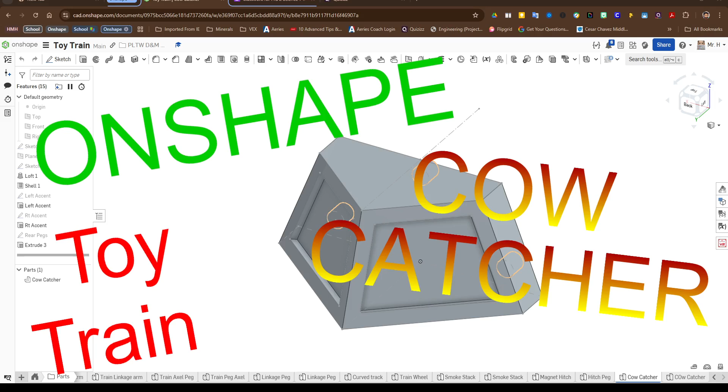So what you're seeing right here is going to be what's called the cow catcher. It goes on the front of older trains, and it's going to stop cows from being smashed. It scoops them up and moves them out of the way. It's not that hard of a piece, it's kind of really simple.

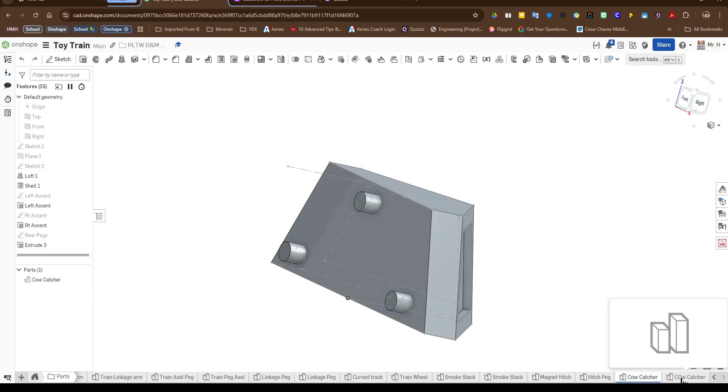So what we're going to do is create our new Part Studio right here, and let's get into it. The first thing we're going to do is make a new sketch on the top. I'm going to click on my view cube up here so I can see the top plane. I'm using the front and the right as my X and Y axis. So what we're going to do is use the line tool, and we're going to make two lines.

One going across here, and we're going to make this 22.86 millimeters, like that. And then we're going to make a second line going vertical, right here, and we're going to make this 6.35 millimeters, just like that.

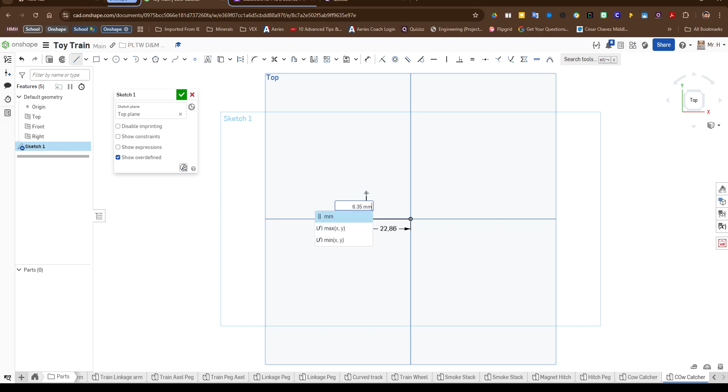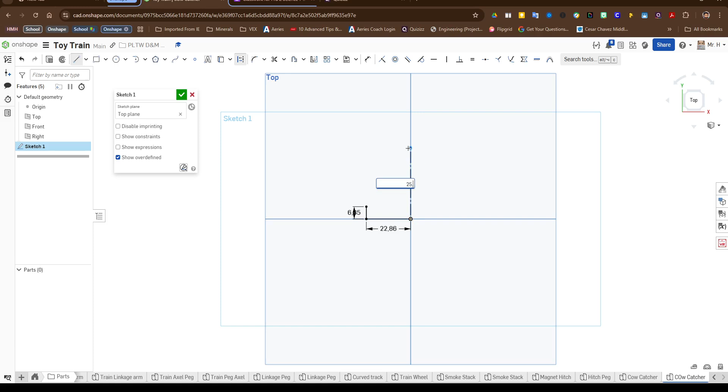Now I'm going to exit out of my line tool by hitting L or coming up here. Then we're going to make another line, take the line tool here, and take the construction option. We're going to make a vertical line at 25.4 millimeters, just like that. Now I'm going to take the construction line off and connect these two lines right here.

That completes that. Now it's really important that we make sure that this is all black. If you have one blue line here, that means your constraints aren't right and you didn't really put it together correctly. Just delete it and start again.

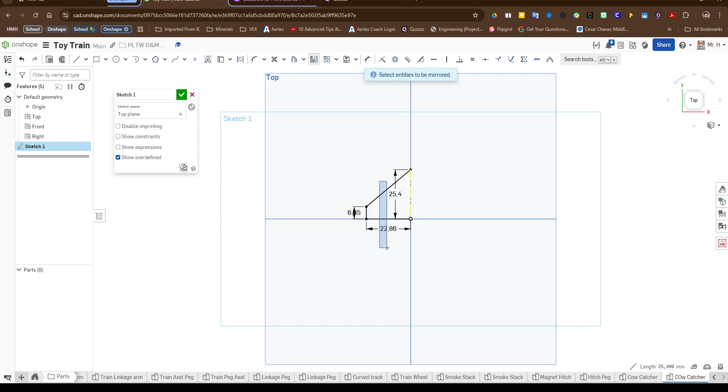Really simple. Now we're going to only get half, so we're going to create the other half, and it's important that we keep this as a construction line. So I'm going to come up to the mirror tool, which is right here. On the mirror tool, I'm going to click on my mirror line, and then go ahead and click on that. Now what I did is, instead of clicking on each one, I just pressed down on my mouse and dragged it so all the lines got highlighted, and it created it in one shot. So that's one way to do it.

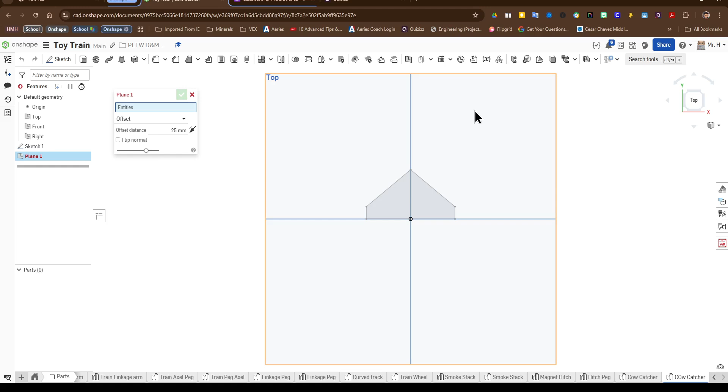All right, so now we have that completed. We have the first part of this done. So now we are going to go ahead and create a plane offset. Take my plane tool on my top plane, and we're going to offset this to 19.05 millimeters, there you go. I'm going to go ahead and just finish that. And now we have plane one.

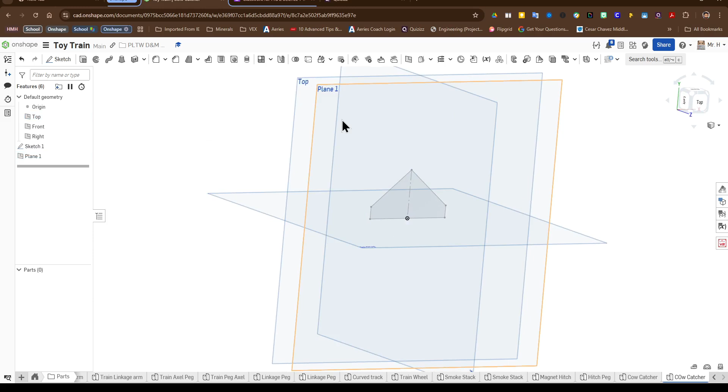So now on plane one, we're going to create a brand new sketch on plane one. That should be our active plane. I'll just go ahead and toggle off the top plane so that we only have that. Now we're going to do the same thing we did here, except with slightly different measurements. So I'm going to go ahead and use this for it here, and create my line.

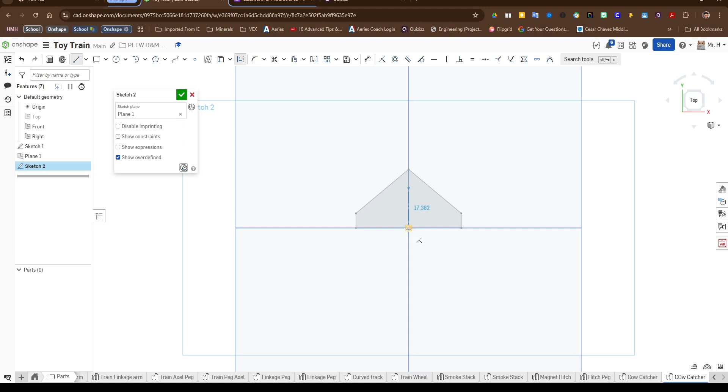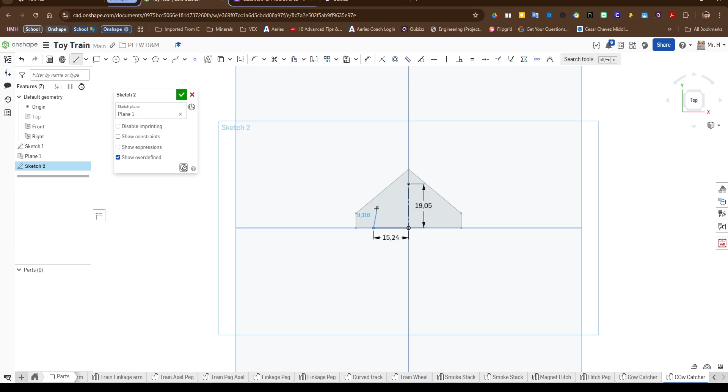I'm going to come down here, just like this, to the center point, origin. And I'm going to make this at 19.05 millimeters, like that. I'm going to remove my construction line. And I'm going to make a horizontal line that's going to be 15.24 millimeters, and then a vertical line at 6.35 millimeters.

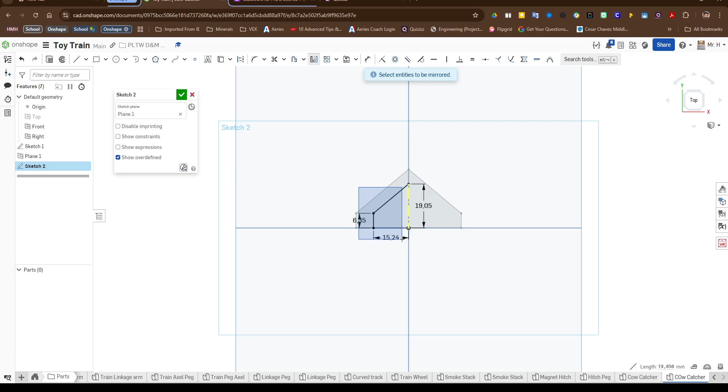I'm just going to connect these two together like so, and that takes care of that. Now I'll deselect my line tool, take the mirror again, select my center mirror line, click out here and drag it, and see if it grabbed it. Now it only grabbed one, that happens sometimes, but we're still in the mirror tool, so just click on here and here, and there you go. Sometimes the mirror tool doesn't always work.

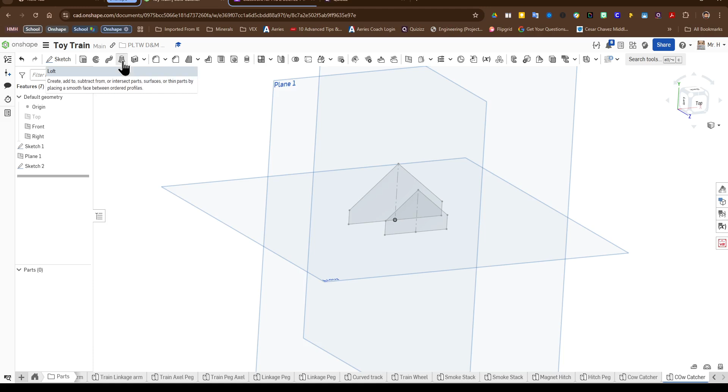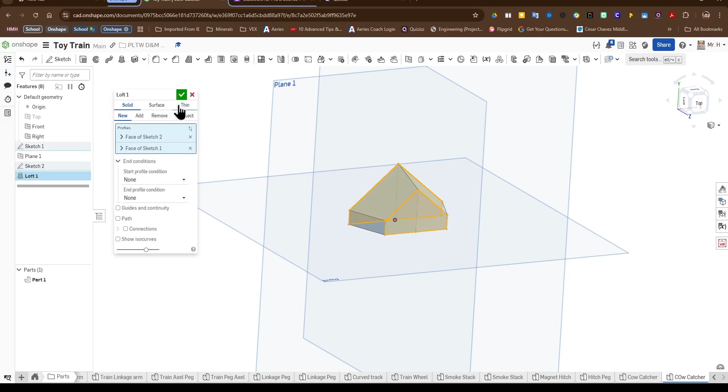So now that we have those two, I'm going to finish our sketch, and now you should have this here. I'm going to come up here to my Loft tool, which is this shape right here, and I'm just going to click on both shapes. Now, if you did not make this a mirror line, it's going to create 4 separate shapes that it's going to try to pick. Because you have the construction line in there, it doesn't register it and creates one solid shape. So I'm going to click on here and here. You should have only face sketch 1, face sketch 2, and just leave everything the way it is. And now you have this shape.

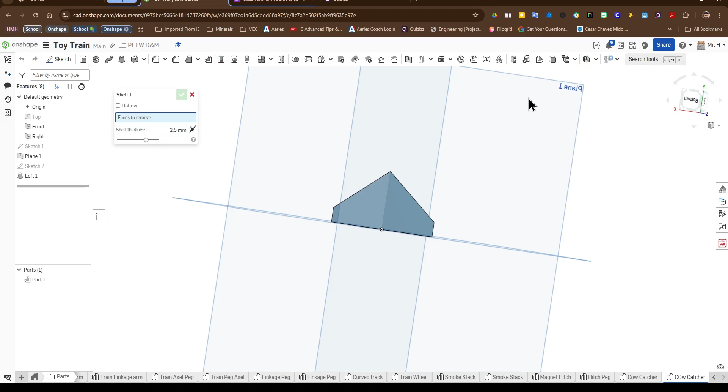Now I'm going to spin this around to the bottom, and in here I'm going to come up to our shell tool. This is the rib, and this is the shell right here. Again, if you can't see it, I'll show you - you can come up to the search bar and you'll see it highlights in yellow, and I can click on it here. I'm going to click on the bottom here, and we want to shell this to 2, now it's already close, but 2.54 millimeters. I know it doesn't really matter, but I prefer it.

So now we have the shape, the shape is coming along. Now, one thing that's going to happen - if you had the blue lines in sketch 1 or sketch 2, you're going to have a tough time creating this because this will be almost invisible to you, and the system will say you can't do this because this is not a solid object. You've got to make sure those construction lines and those lines we created for our sketch are all black - that makes it a solid shape.

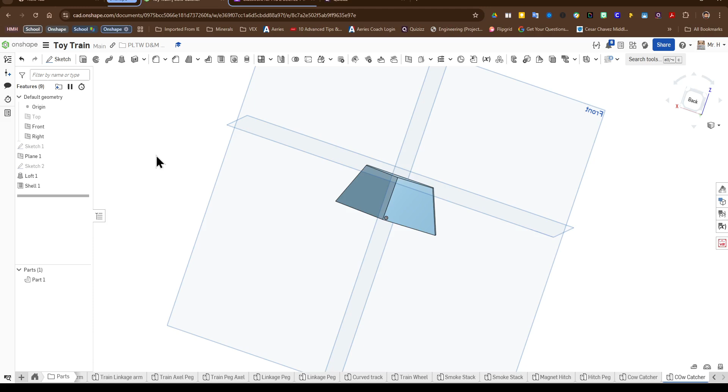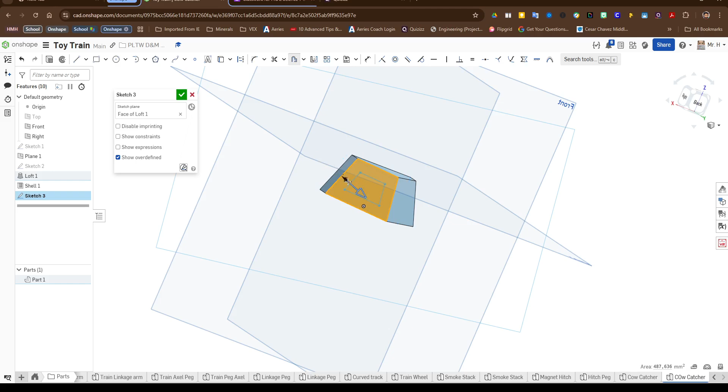So I'm going to take a sketch and see how it creates this sketch right here on this plane. What we're going to do is come in here and take the offset tool, which is right here, this shape right here, and I'm just going to click on this shape right here. What I'm going to do is create an offset, then I'm going to take this arrow and click it on the inside, right? And zoom in a little more so you can see this. We're going to put this at 2.591 millimeters, like that, and we're going to finish that sketch.

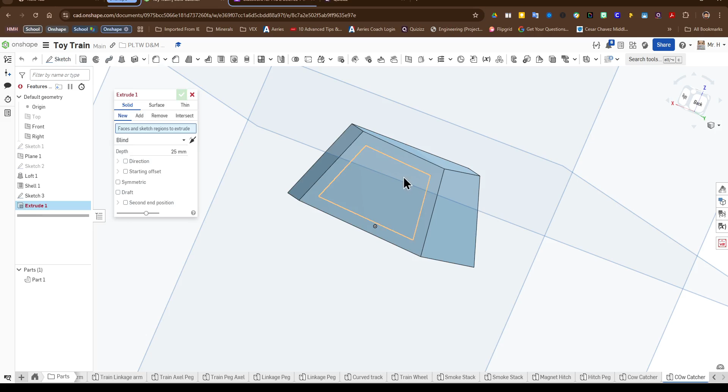Then I'm going to come in here to the extrude command, I'm going to take that, we're going to hit the remove option. But we're going to set this to 1.27 millimeters. And there gives us our first design.

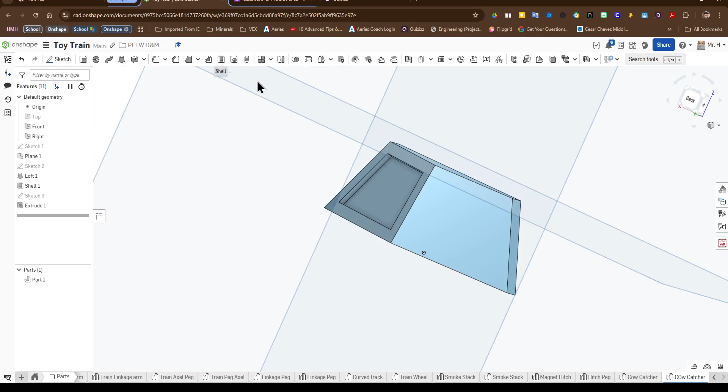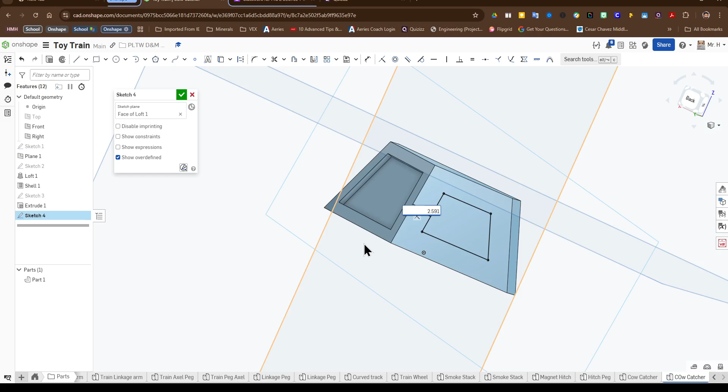Now we're just going to repeat the same thing. If I come in here and click here, create a new sketch, there you go. And we come in here and click on the offset, click on here, click on here, again click one more time, and then we're going to come in here and type in the measurement 2.591. There you go, and extrude this right there. Remove, set it to 1.27 millimeters. And there you go.

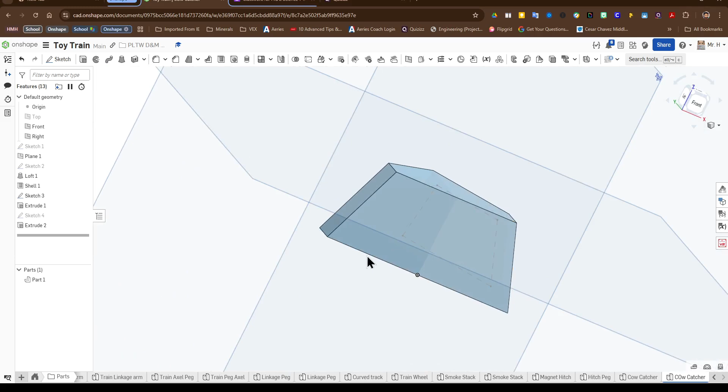So we have this part done. Now we just have to finish this up and we are pretty much done. So we're going to move to the back, and this is going to be another simple thing we can do. What we're going to do is really simple.

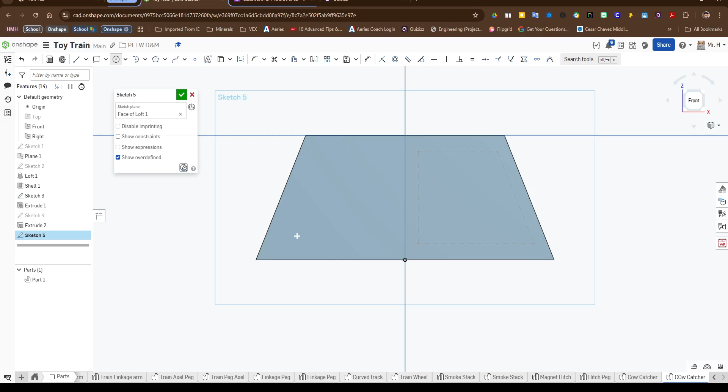We're going to make 3 pegs here in the back. I'm going to take my sketch tool and put a sketch here. Now I'm going to take my circle and put one right here in this corner, like that. And we're going to make this the diameter of 3.175.

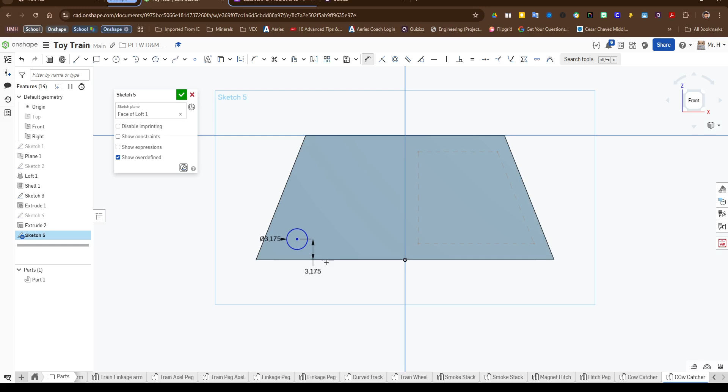And then I'm going to dimension this, take that D key on the keyboard or the dimension tool right here, and I'm going to dimension it from the bottom line here to 3.175, exactly the same for the dimension of the diameter. Then from the center, I'm going to go from the edge here, and I'm going to make this at 6.985 millimeters.

Now I'm going to need one on the other side, but we're going to do this real simple. I'm going to take this off for a second and use my mirror tool. Again, we're using this axis right here. Turn it to my mirror line, come over here, click on that, bing, bang, boom, we're done with that.

Now we're going to disconnect this, and we're going to put one last shape on here, one more circle. I'm going to put the circle right here on this axis because we need it to be dead set in the middle, like that. Now, same diameter, 3.175, like that. Okay, now there's another thing you could do, let's make this smaller.

I'm going to make this 2 millimeters, like that. Now we can come up here and find this constraint called equal. So if I click on this, and click on this, it should try to make it equal. Now it depends on how you do it. So far, that's not right. So I'm going to come in here, click on here, click on here. Again, it won't do it.

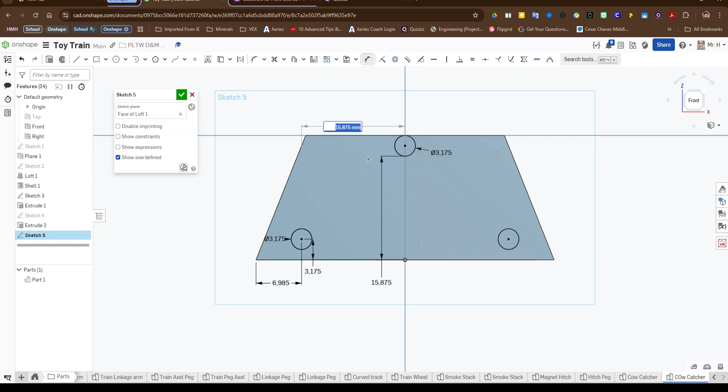And now this thing should also be dimensioned at 15.875, just like that. Okay, so we have those dimensions, and you don't really need these other dimensions, but you'll see that they're pretty much accurate to what you need.

Now you'll notice that this thing is a little bit high. So if it does end up like this, then what you need to do is just get rid of that measurement, and then go ahead and redimension it from the top here. And you're going to dimension this to 3.175. That should drop it down to exactly where you need to be.

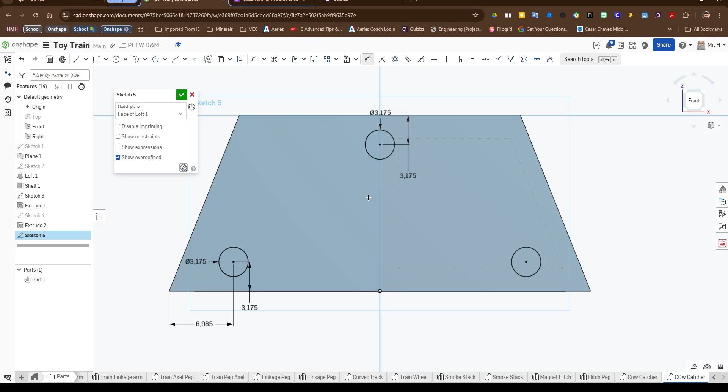Okay, so in case you're wondering what the full dimensions are, this is what the full dimensions are. That's the distance between these two here. And each one of these is exactly half the distance between each other, right there. And because we used the mirror, that's done.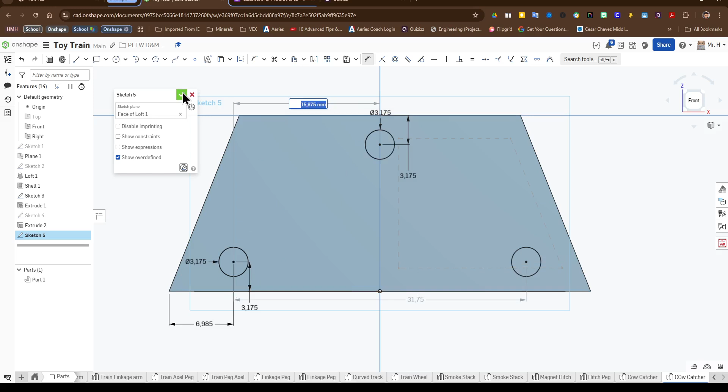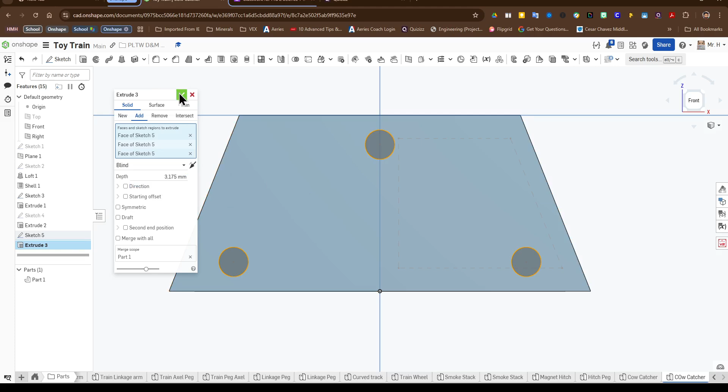So I'm going to come in here and finish this off. I'm going to go ahead and extrude all three of these little pegs out, to a blind of 3.175 millimeters, like that. And with that, we should be finished. There you go, guys, and so that finishes the cow catcher piece.

I'm just going to go ahead and take these off here. And lastly, I'm going to rename this to cow catcher, which will make it easier later in our project for our next part. And I can't spell for the life of me. Close enough.